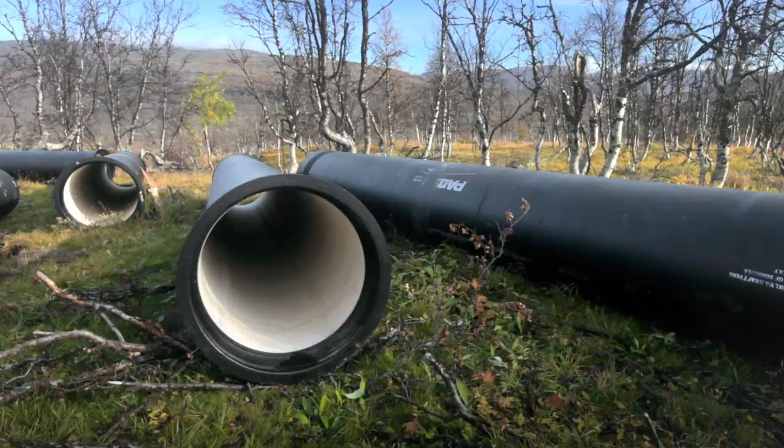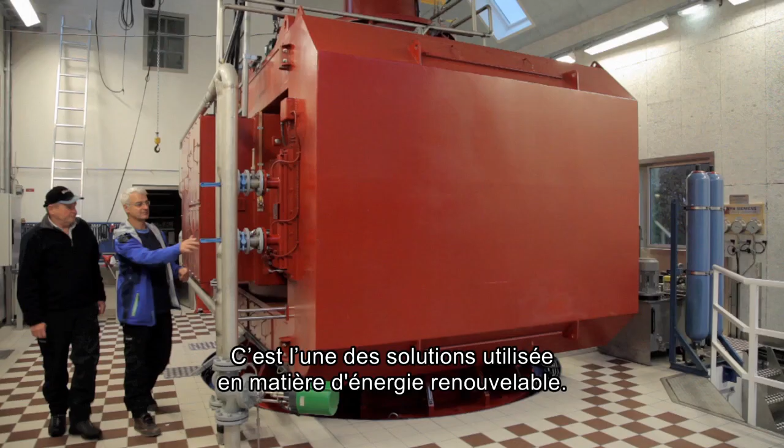Tussa is a power company located on the northwest coast of Norway, and we produce electricity mainly from hydropower. And hydropower is one of the solutions when it comes to clean energy. Norconsult has been in the hydropower business for at least 100 years altogether. And we are working worldwide with projects in all areas of the world.

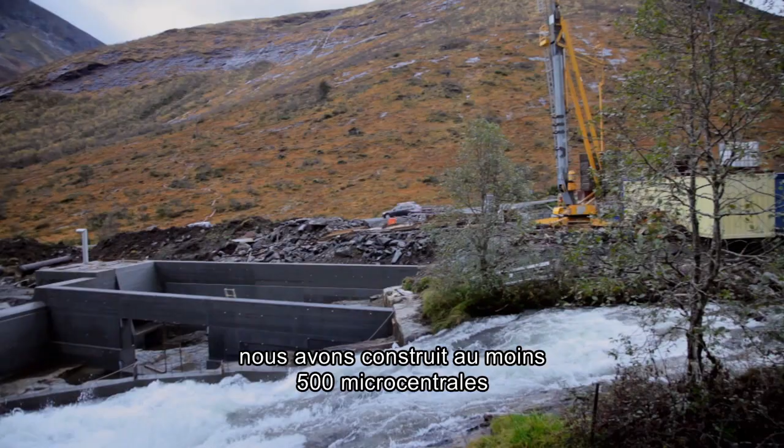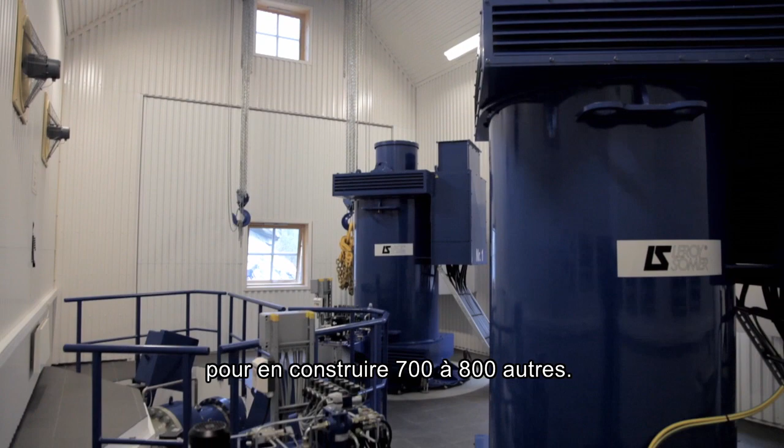The potential for hydroelectric power plants worldwide is enormous. And even in Norway specifically, we have seen that we have built at least 500 new small power plants the last decades. And we are at least awaiting 700 or 800 in line for the Norwegian government to approve. So the potential is enormous.

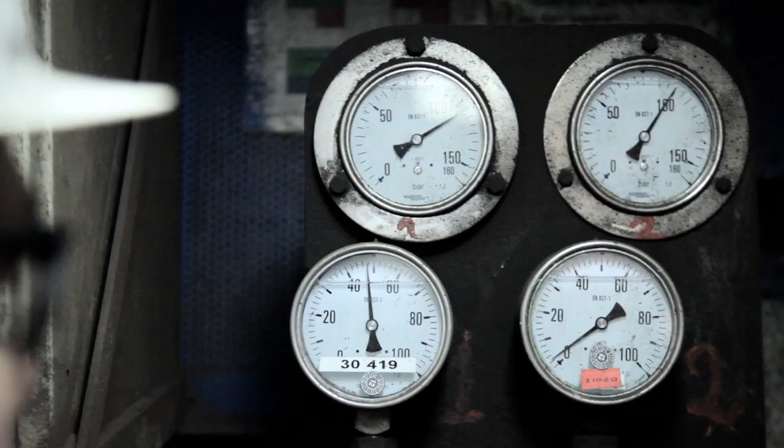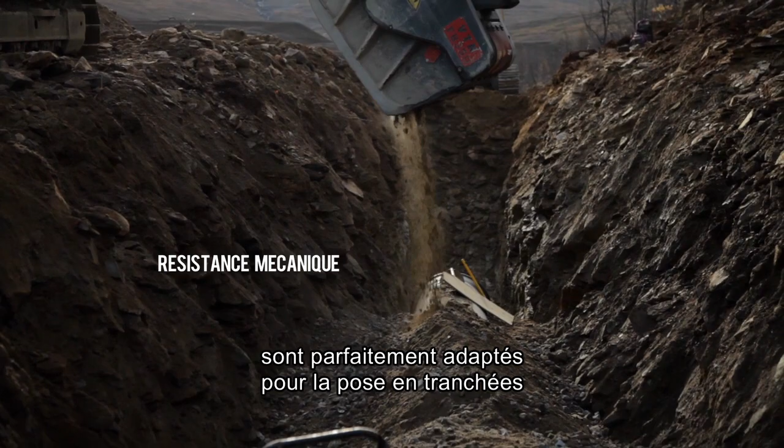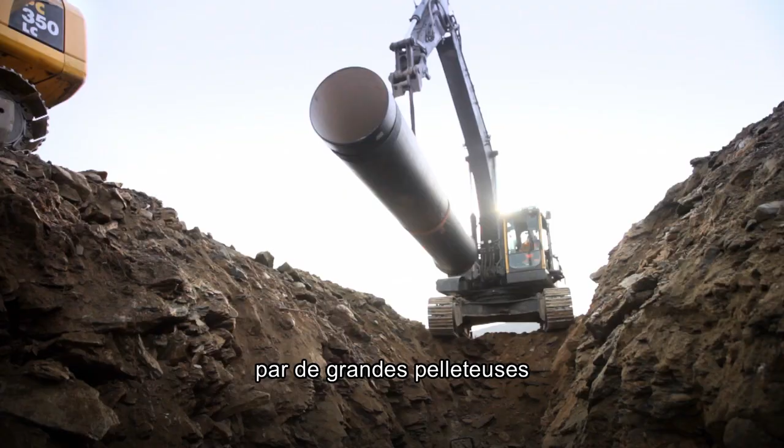The ductile iron pipes are perfect to lay in the trenches by using the local material for backfill. Ductile iron pipelines are very solid, and big excavators handle the tubes very roughly. And when it comes to laying the pipelines into the ditch, they can also handle small deviations, 2, 3 or 4 degrees along each length of a tube.

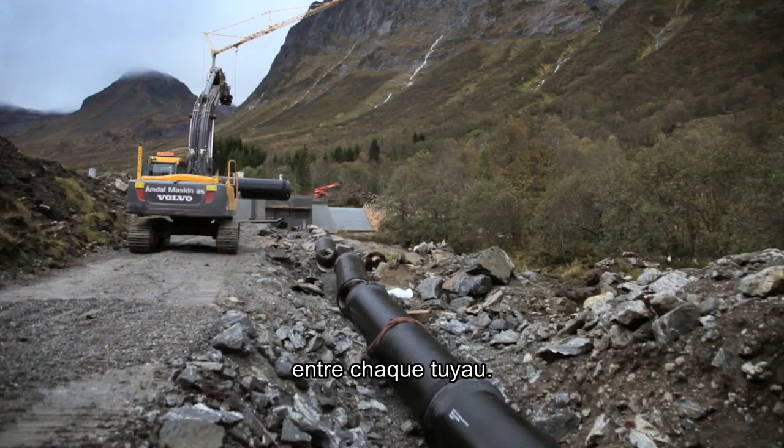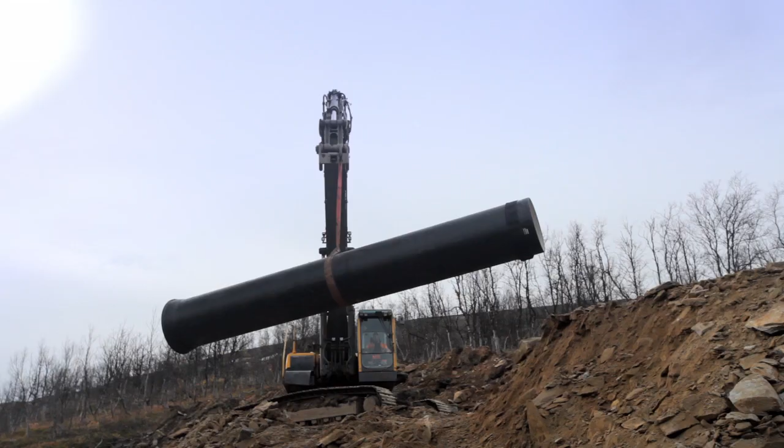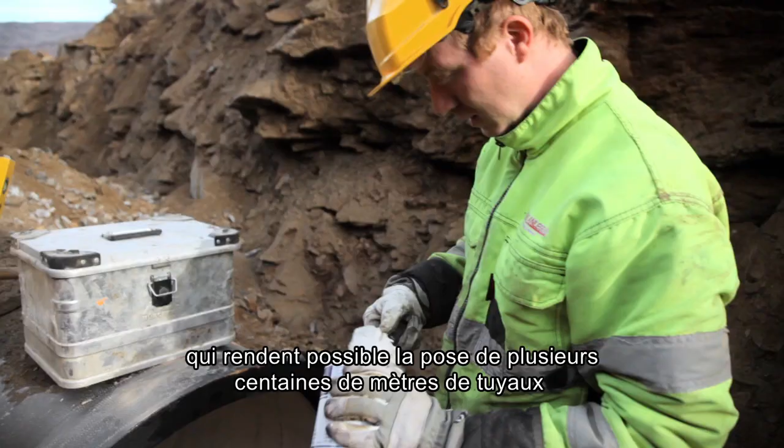And that's very well suited for our terrain because it goes up and down and turns both in the horizontal and the vertical plane. We have found it very nice to use anchor joints. That makes it possible to lay several hundred meters of pipes in steep inclinations with only one anchoring at the top.

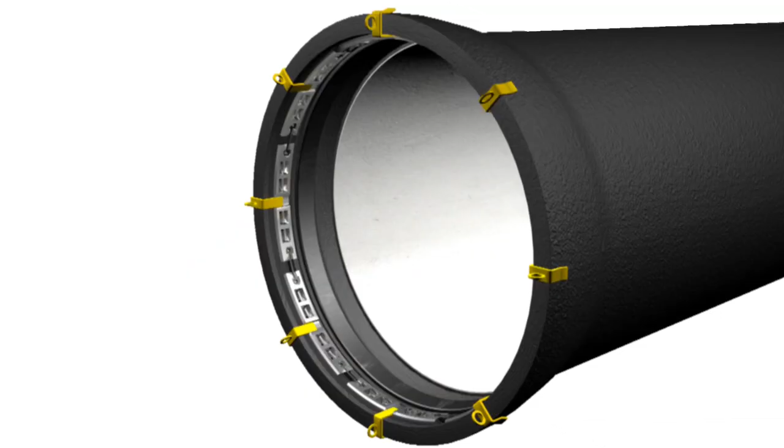We have experience from laying the pipelines all through the year, in summer conditions and winter conditions, and we have no problems handling the pipelines all year round.

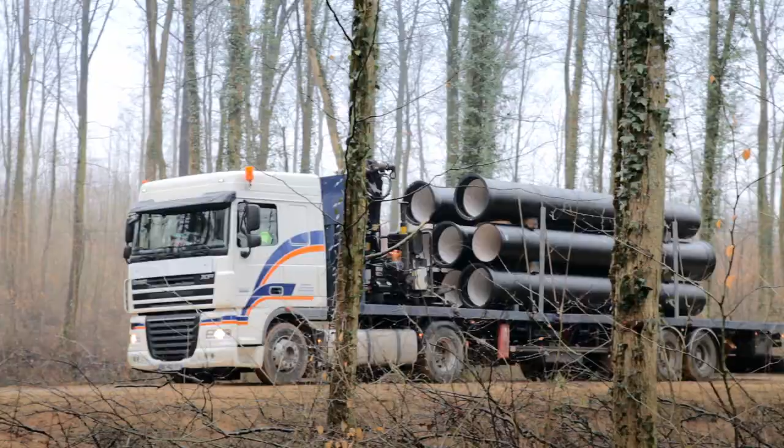The security requirements in Norway are quite difficult because we have a Norwegian Water Authority, and they are following all the building and all the finished power plants and also the power plants that are planned. They have quite big requirements for the security of the power plants. Ductile iron pipes are very good at fulfilling these governmental security demands.